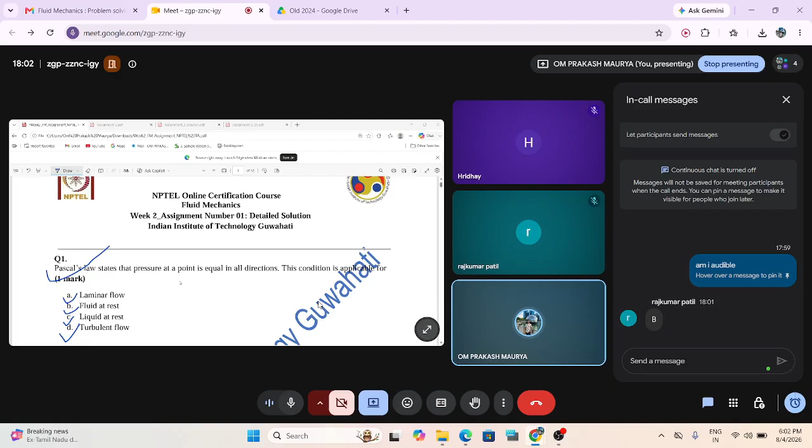Okay, so Patil is telling option B is correct, the fluid at rest. Yeah, definitely. Pascal's law talks about when the fluid is at rest. So your option is correct. This is a very basic question from your fluid statics. So now let us go with the second question. Let me just go to the second question.

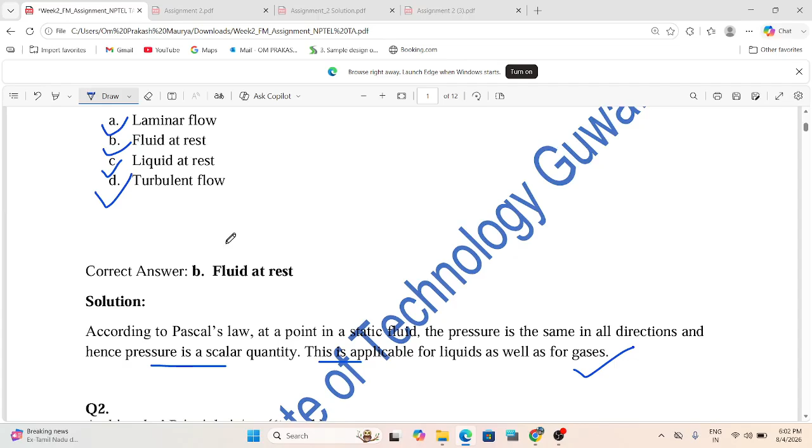So the explanation is, according to Pascal's law, at any point in a static fluid, the pressure is the same in all directions, and hence pressure is a scalar quantity, and this is applicable for liquid as well as for gas. So it should be for a fluid at rest. Option B is correct. So now let us go for question number 2.

Very interesting, very important. So Archimedes' principle is, and maybe one or more than one option is correct. So A, the floating body displaces its own weight in the fluid in which it floats. Option B is there, and option C and option D. So please just try to write your answer in the chat box. Just read the question very carefully.

Okay, so Rajkumar is telling D option. Other participants also just try to write your answer in the chat box. I'm waiting for another response, please. Just try to write your answer. You have 1 minute more.

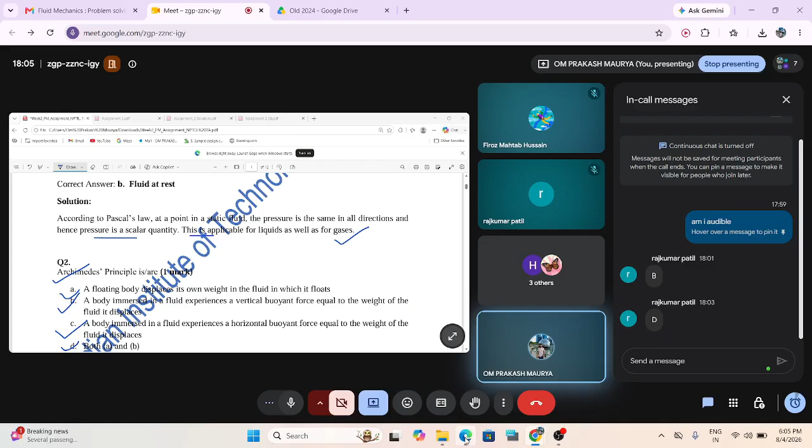Okay, so now let us explain. So yes, option D is correct. So as per Archimedes, option A and B both are correct. A floating body displaces its own weight in the fluid in which it floats. The meaning is, let us suppose you have put a body which is floating in the fluid, and whatever the volume is within the fluid, that much volume or that much weight of the

water will be displaced. And the weight of your displaced fluid is equal to the weight of the body. So the first one is correct. Option B, a body immersed in a fluid experiences a vertical buoyant force equal to the weight of the fluid displaced. This is correct. So both options are correct. So now let us move on to the next one. Here the explanation is given very well, so you can go through it.

Now numerical, 1 mark. So Umiam Lake is a freshwater lake near Shillong, India. It has a maximum depth of 40 meters and the mean atmospheric pressure is 91 kilopascal. Estimate the absolute pressure in kilopascal at this maximum depth. Take the specific weight of the water as 9790 Newton per meter cube. So you have to calculate. You have 4 options. So estimate the total absolute pressure in kilopascal.

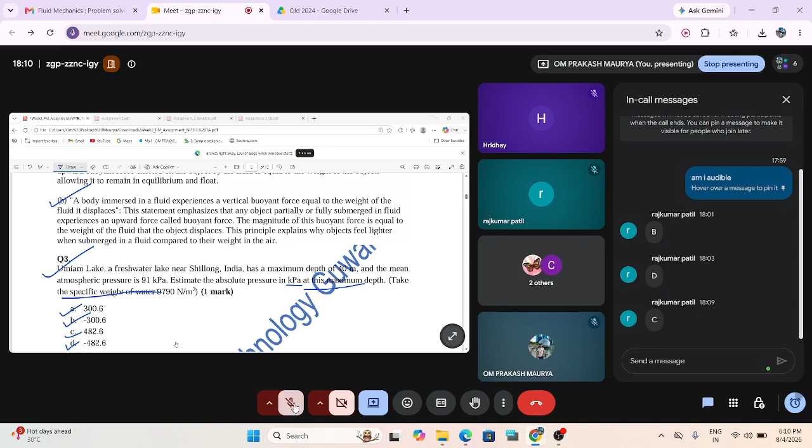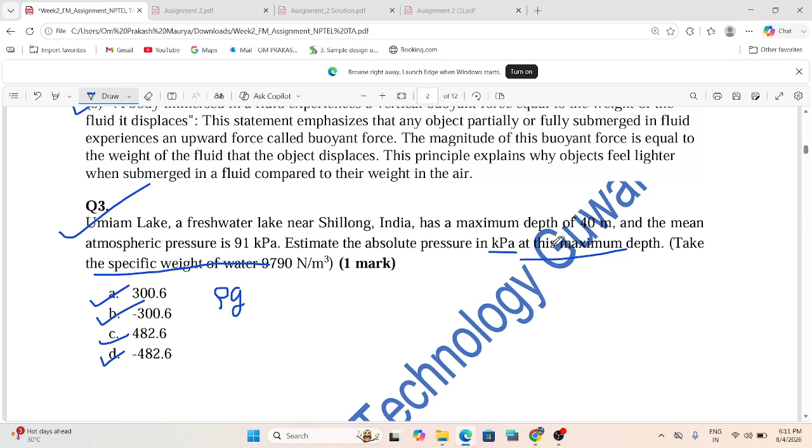Okay, so this is a very simple question. Let me just show you the answer. Here you can see the pressure is nothing but P is equal to rho g h. In the question, a specific weight is given. Specific weight is nothing but rho g. This is the specific weight and 40 is your depth; in the question it is written itself, 40 meters. So now rho g is 9790. So you will get this in Pascal.

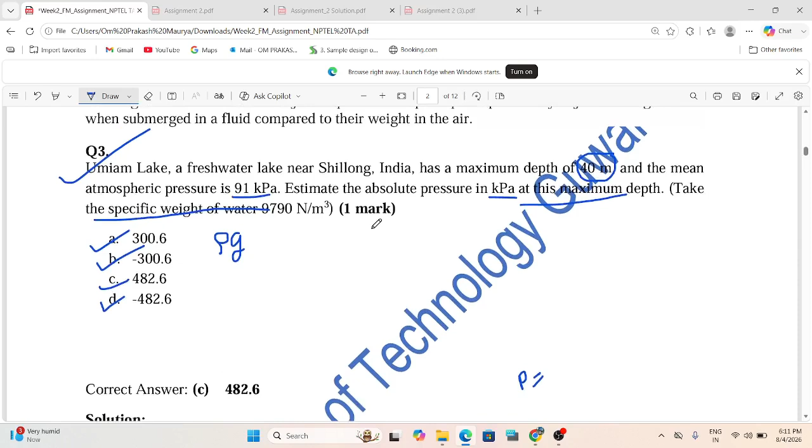Now the question is asking about the absolute pressure. So this is your gauge pressure. Now when you add the atmospheric pressure you will get the absolute pressure, and atmospheric pressure is 91 kilopascal. So finally we get 482.6 kilopascal. So option C will be correct for question number 3. Now let us move to the next question, question number 4.

A manometer is used to measure the pressure in a tank. The fluid used has a specific gravity of 0.85 and the manometer column height is 35 centimeters. If the local atmospheric pressure is 96 kilopascal, determine the absolute pressure P within the tank in kilopascal. So you have option A, option B, option C and option D. So please just write your answer in the chat box.

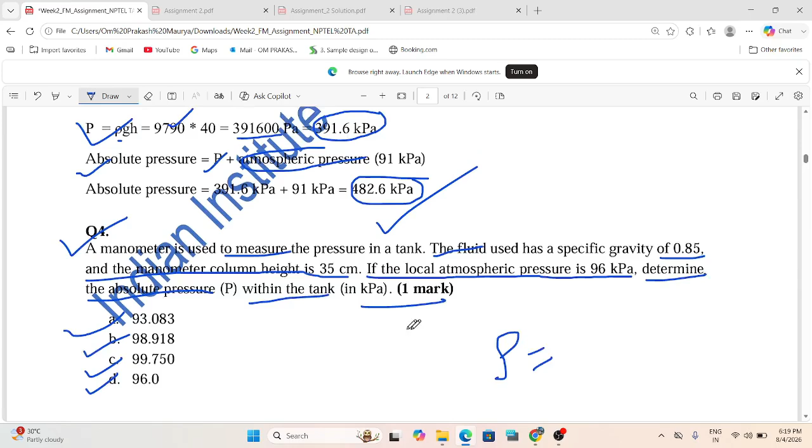So this is 0.85 and 1000, this will be rho, and g is 9.81 and h is given 35 centimeters, so you have to put in 0.35 in meter. So finally we will get 2.918, and atmospheric pressure in the question is given 96, so finally we will get 98.918 kilopascal. So here your option B is correct for question number 4. So now let us move on the next question, which is very interesting one.

So a tank contains two immiscible liquids of densities rho 1 and rho 2. So rho 2 is greater than rho 1, that is rho 2 is heavier than rho 1. If the height of the column of the liquid which has density rho 1 is h1 and that of the liquid with density rho 2 is h2, so the pressure at the interface between the two liquids is, so options A, B, C, D are given. So just think, very interesting question. So try to solve this question please and write your answer in the chat box.

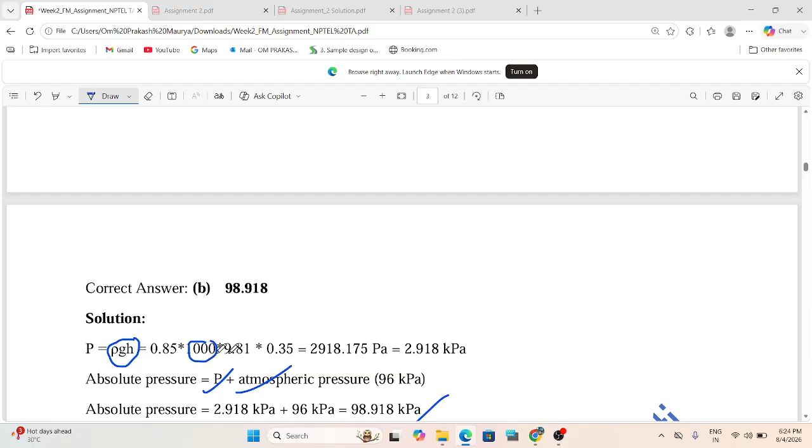So here you can see this is for the previous question, rho gh. So yes, in the question specific gravity is given 0.85. So specific gravity is what? The specific gravity is the ratio of the density of the fluid divided by the standard fluid. So when we calculate the density, specific gravity into the standard fluid density will give you rho, and then g is there, and h in the question is given. So you will get this in Pascal, so you have to convert into kilopascal. So finally this is your answer.

Now for question number 5, so you please just write your answer in the chat box. Hope you understand the previous question.

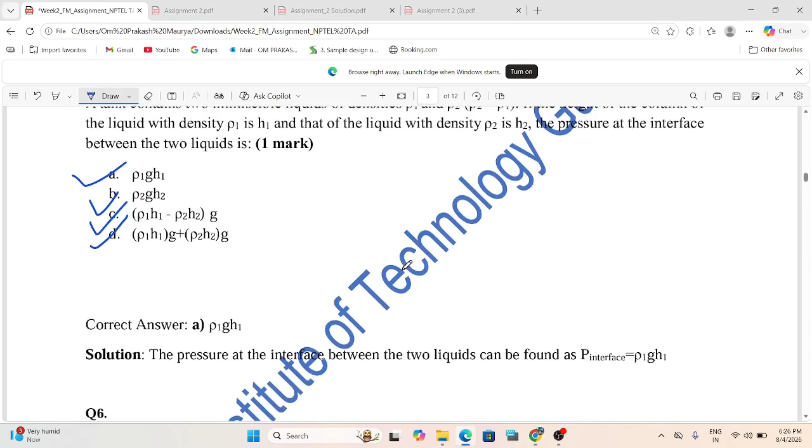So let me just explain you question number 5. So here, yes, this is definitely rho 1 g h1, because the question is talking about you have like that. The heavier one will be below, rho 2, this is your rho 1, and the height is h1, here height is h2. So your pressure will be at this location from the top. This is your liquid, so it will be at this interface.

So rho 1 g h1. If the question was asking at this location, you have to combine all. But the question is asking here, so rho 1 g h1, so option A will be correct. Hope you understand. So now let us move on the next one. Yeah, option A is correct. Thank you.

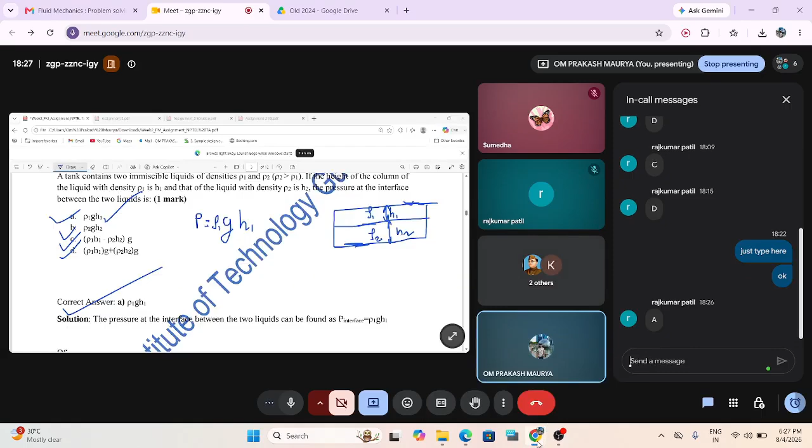So now the next question, question number 6. For a floating body, the metacentric height is the distance between. So you have 4 options. So please just try to write your answer in the chat box.

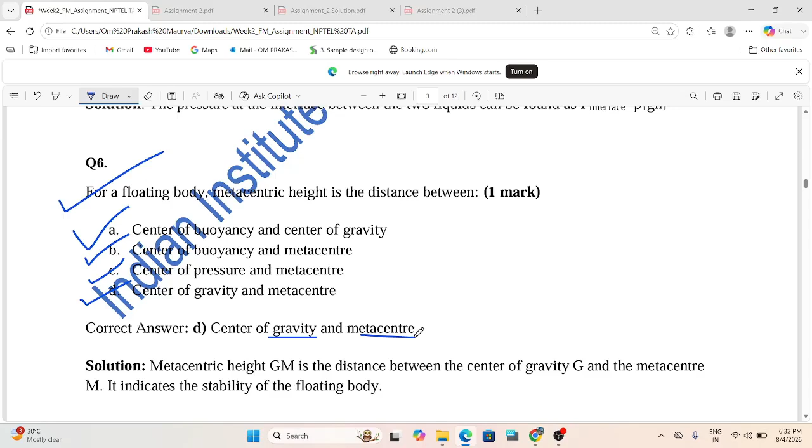Okay, so let me just show you the answer. So actually the metacentric height is the distance between center of gravity and metacenter. So remember always please. So here explanation is given. You can go through. So metacentric height GM is the distance between center of gravity and the metacenter M. It indicates the stability of the floating body. So now let us move on the next question. Question number 7.

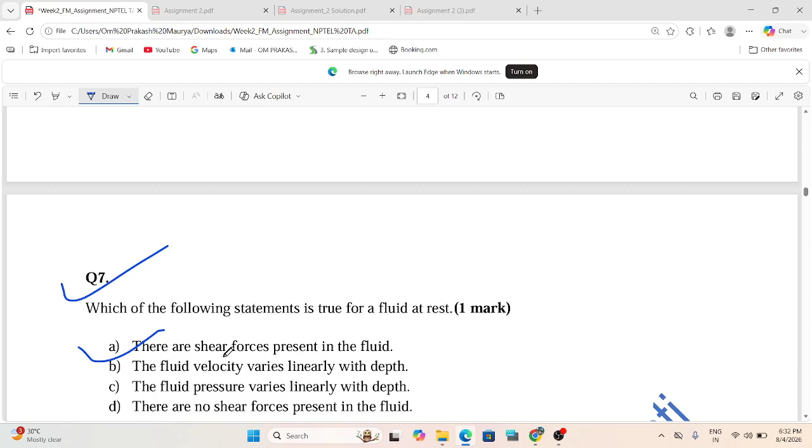Yeah. So which of the following statements is true for a fluid at rest? There are shear forces present in the fluid. The fluid velocity varies linearly with depth. The fluid pressure varies linearly with depth. There are no shear forces present in the fluid. So which option will be correct?

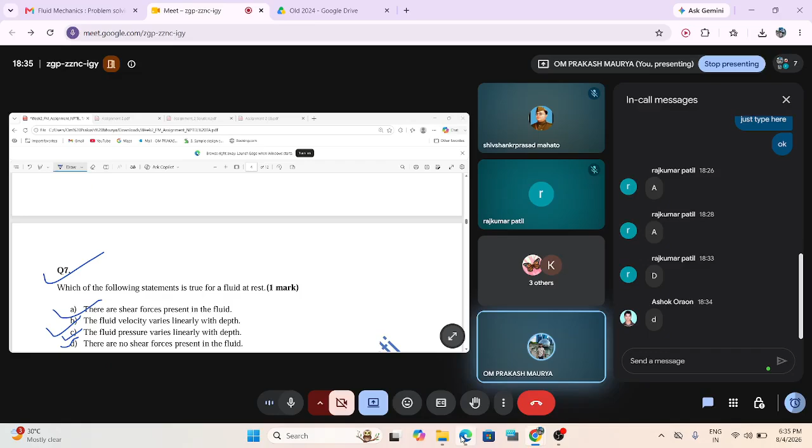Okay, so Rajkumar is telling option D. So I'm waiting for other participants. Option D or... Okay. Okay, Shivshankar. So Ashok is also telling D. So D should be correct. Let me just go. Yeah, option D is correct for question number 7.

So the explanation is, in a fluid at rest, there are no shear forces because shear force arises from the fluid motion. The only force present in the static fluid is the normal force due to pressure. Now let us move on to the next one. Question number 8.

So the concept which defines that the pressure at a certain horizontal level in a static fluid is proportional to the vertical distance to the surface of the fluid is known as: Pascal's law, the Magnus effect, Archimedes principle, or hydrostatic paradox. So which option will be correct, please?

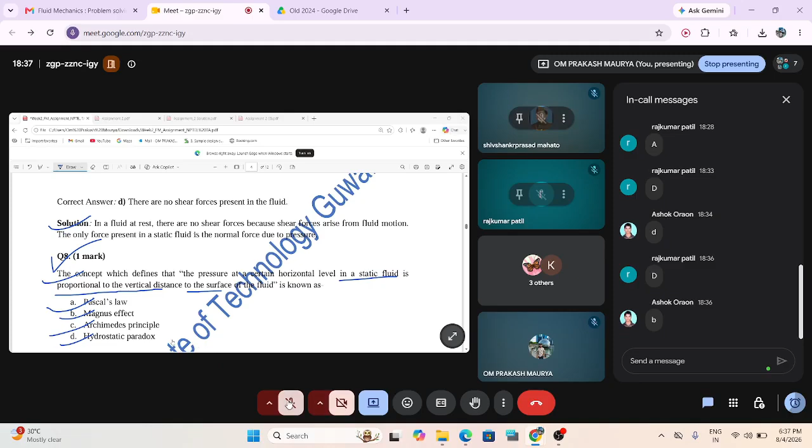Okay, so Rajkumar is telling D and Ashok is telling B. Okay, let me just see. So let me just show you the answer. So it is hydrostatic paradox. Remember, please, option D will be correct. So what is the solution?

The hydrostatic paradox states that the pressure at a certain horizontal level in a static fluid is proportional to the vertical distance to the surface of the fluid. That means on a horizontal plane, at each point, the pressure is the same, provided they are interconnected by the same fluid only. So remember. So next one, question number 9.

So a cube of dimension 2 meter is floating in the water with an immersed depth of 1 meter. The unit weight of water is 10 kilonewton per meter cube. So what is the weight of the cube in kilonewton? Okay, so he's telling option A. Okay.

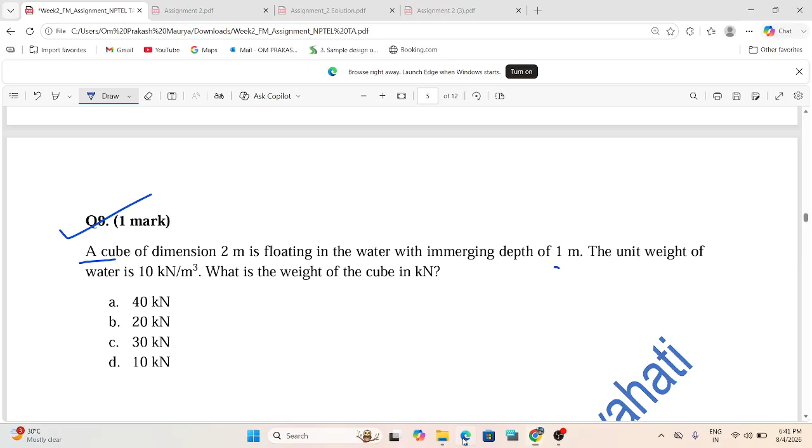Okay, so let me just show you the answer. Yes, A is correct. How? A cube of dimension 2 meter is floating in water with an immersed depth of 1 meter. Means, let us suppose, you have one cube which has the depth of 2 meter. Okay, so 1 meter is immersed. This much is within water. This is 1 meter.

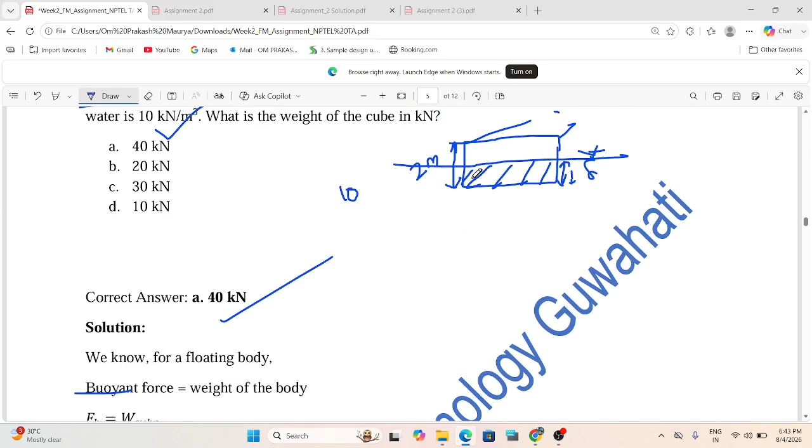The unit weight of water is 10 kilonewton. What is the weight of the cube? So weight of the cube is what? As per the Archimedes principle, the buoyant force is equal to the weight of the body. So what will be the buoyant force FB? FB is nothing but the weight of the displaced volume, weight of the displaced water. So rho g and volume.

What is force? Force is nothing but your mass M. So what is M? M is rho by V. So what is your, no sorry, rho is equal to m by v. So what will be the m? M is rho into v. So this is rho into v and g.

And weight of the cube is what? Here it is given the unit weight 10 kilonewton per meter cube. So you have to multiply with the volume. So volume is 2 into 2 into 1. So finally you will get 40 after the calculation. So your option A is correct for question number 9.

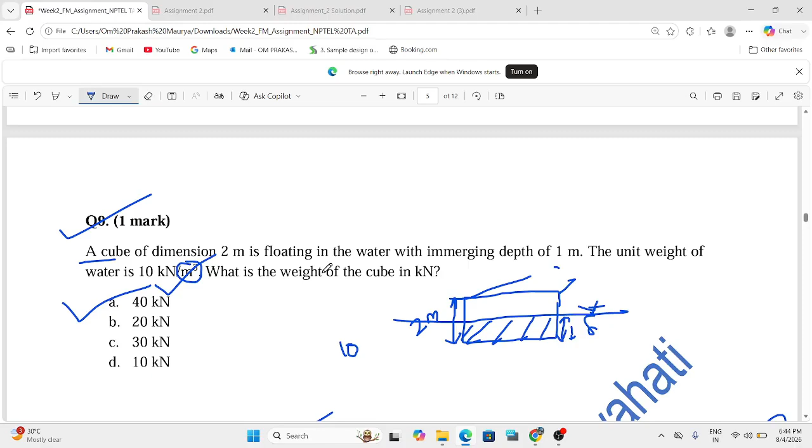So here it is the immersed volume. Remember please, this is your y1 because we are considering the immersed volume. Why immersed volume? Because the immersed portion only is displacing the water, not all portions of the body. That's why. So now let us move on to the next question.

The specific gravity of an oil is 0.8. What will be the equivalent head of oil if the head of water is 400 centimeter?

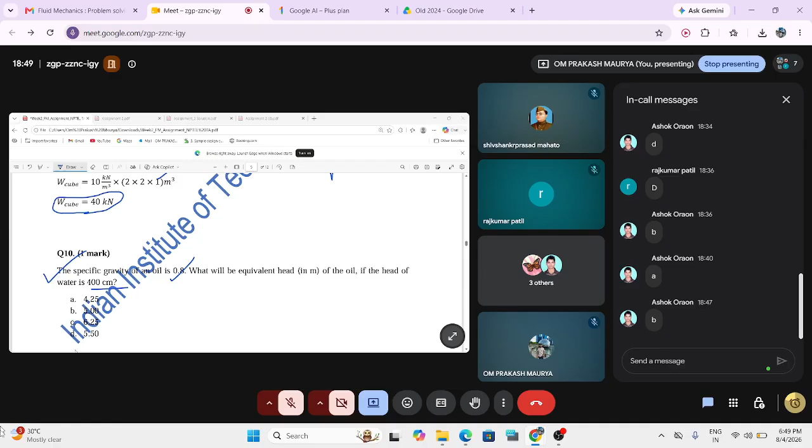Okay, so let me just explain. So you have the specific gravity of oil is 0.8. So the density will be 800 kg per meter cube. If the head of water is 400 centimeter, head of water means what? H you have 400 centimeter, means 4 meter.

So this is... so one thing is important: the pressure on both sides due to oil is equal to the pressure of water, because the question is asking about the equivalent head, which means equating the pressures.

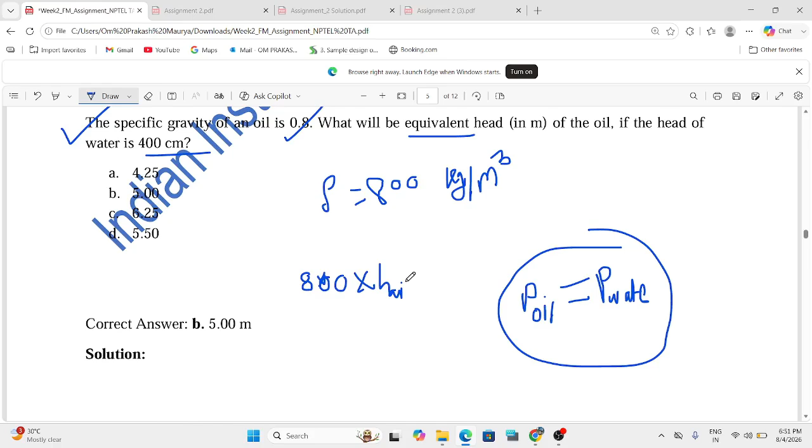So pressure is what? Rho gh. So rho is 800 into g, g will be cancelled out, and h of the oil is equal to, so here also rho of water, g and h. So g and g will be cancelled out. So here, why is this written like that, how will we get the 800?

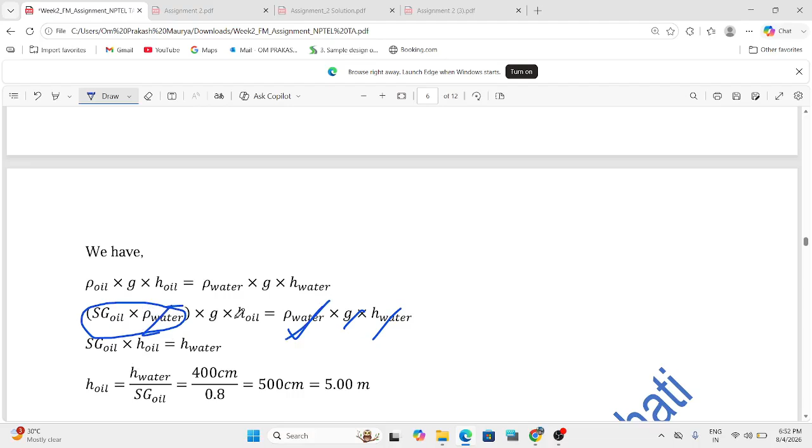So rho of oil divided by rho of water is your specific gravity. So rho of oil is nothing but specific gravity into rho of water. So it is written here. Rho of water will be cancelled out. So specific gravity of oil into height is equal to the height of water. So finally you will get 5 meter. So option B will be correct for question 10.

So now let us move on to the next one. Very interesting. A block of concrete weighs 500 Newton in the air and weighs only 250 Newton when immersed in fresh water. The specific weight is given here. What is the average specific weight of the block? So you have four options in kilonewton per meter cube.

So actually today I have a power problem, the electricity. So maybe after 5 minutes I'll join through my mobile and then I'll record the session and we'll discuss the questions. So in between, if the call disconnects, please be there. I will join. Okay, sir.

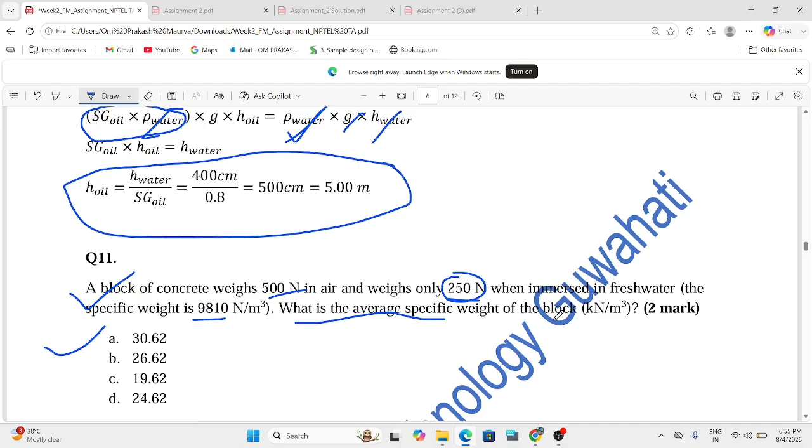So let me just show you the answer. So here you have the concrete weight 500 Newton. When we immerse it in the water, the weight is only 250 Newton, as you know, due to the buoyant force. So the question is asking about the average specific weight of the block. Now, let me just show you the solution.

So concrete weight is nothing but gamma into volume, which in the question is given as 500 Newton. The air effect is neglected. When we immerse it in the water, you have to take the submerged weight: gamma of the block minus the unit weight of water, into volume. So this is equal to 250. So you have two equations, one when immersed in the water, another in the air. The average specific weight of the block you have to calculate.

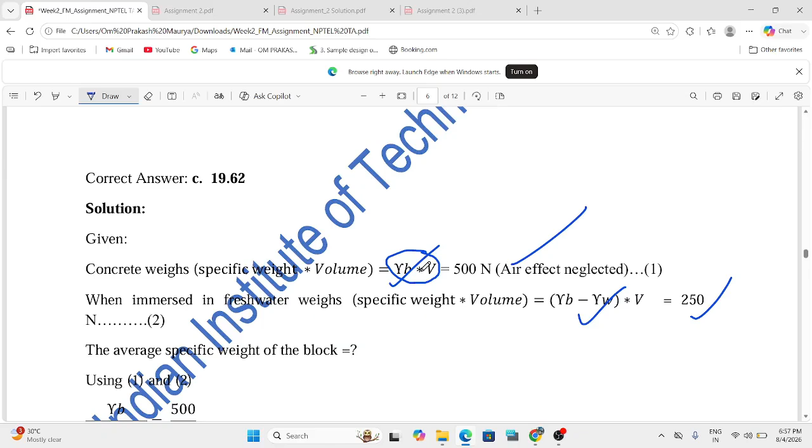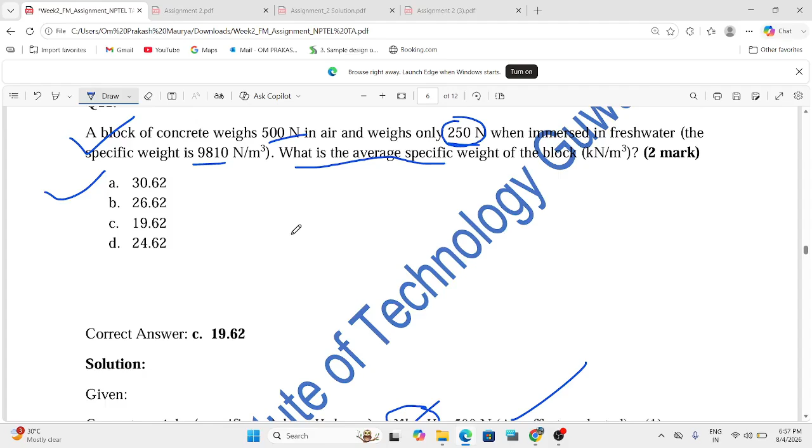So when you go for calculation, just divide equation 1 and equation 2. The unit weight of water in the question is given, 9810 Newton per meter cube, but here you need to put it in kilonewton, so it will be 9.81. So finally you will get 19.62 kilonewton per meter cube. So hope you understand question number 11.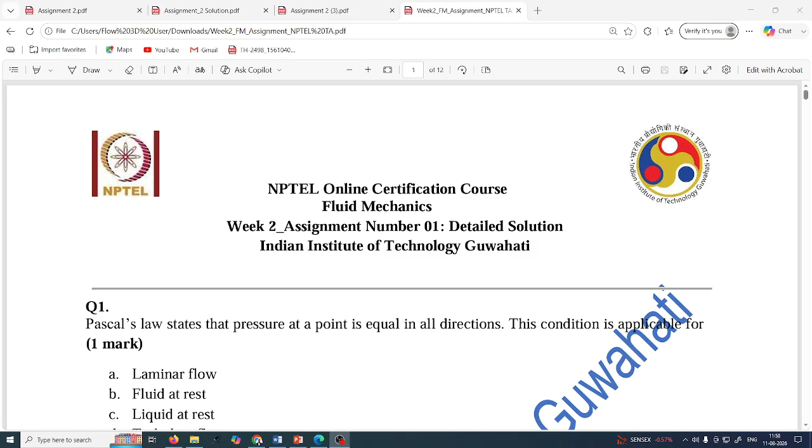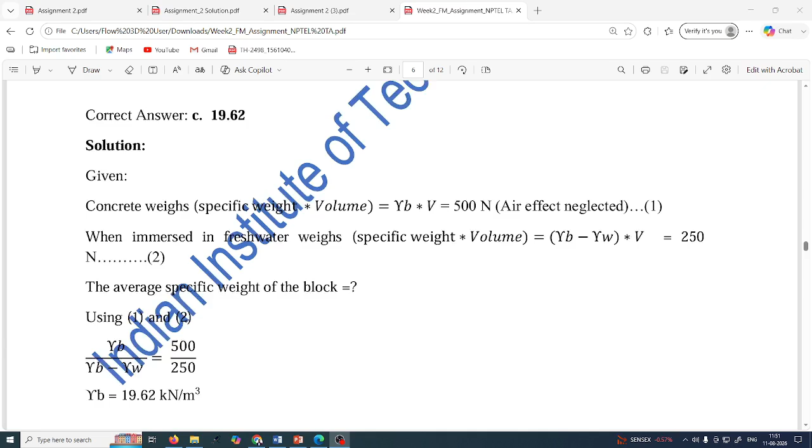Now question number 12. So on 4 August we solved 12 questions for week number 2. There was an electricity problem at that time, so we solved up to question number 12 only. So let us start with the further ones. That time I recorded only 1 hour, so the remaining 1 hour I am going to record here. So we'll see a lot of questions. We have solved up to question number 11, I think. So yes, question number 12 needs to be calculated.

So question number 12: a vertical rectangular gate 3 meter high and 2 meter wide is submerged in water such that the top edge is 1 meter below the water surface. Calculate the total hydrostatic force acting on the gate. So you have a rectangular gate which has 3 meter height and 2 meter width.

The 3 meter and 2 meter, and 1 meter below the water surface. So this is 1 meter. All units in meter. Now you need to calculate the hydrostatic force acting on the gate, how much hydrostatic force acts on your gate. So how will you calculate?

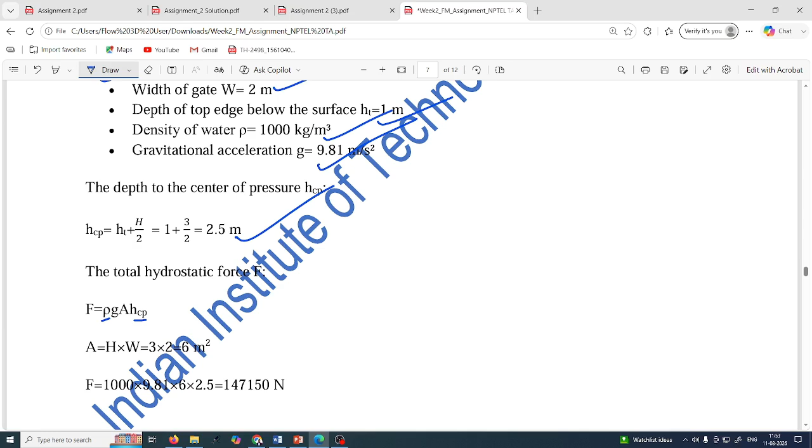Now what is force? This will be rho g h into A, that is the rho g h I was talking about, and A will be what? A will be height into width, which is 6. So finally you will get F equal to 1000 into 9.81 into 6 into 2.5, so you will get the final value.

147150. So this will be your correct answer for this question. So for question number 12, option A will be correct. Hope you understand what I am talking about.

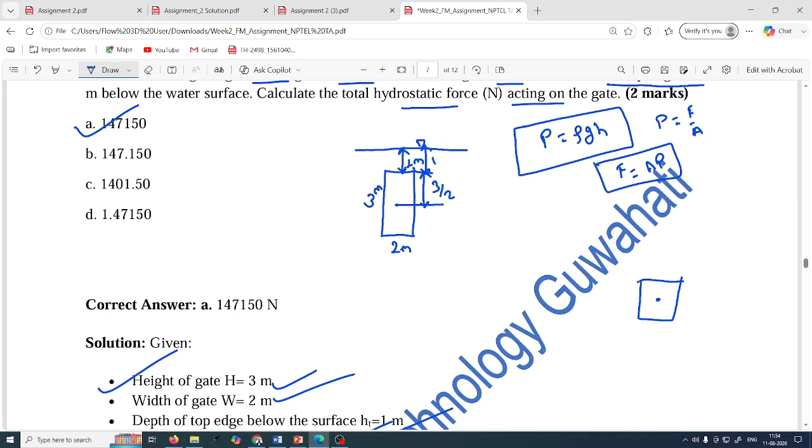So now, h means what? h means the middle one. So here this is your 3 by 2 and this is 1. So the center from the top will be 1 plus 3 by 2. That's why here it is written 1 plus 3 by 2. So now let us move further.

Question number 13. A wooden block of density 500 kg per meter cube with dimension 2 meter into 1 meter into 0.4 meter is floating in water. Determine the volume of block submerged in water. So here we need to calculate the volume of block submerged in water.

You have the water surface, and let us suppose this is your block, which has 2 meter, 1 meter, and thickness 0.4. So now we need to calculate the submerged volume. The density of your block is given, and the density of water you know already, 1000. So we need to consider these two things. So how will we proceed? As per the Archimedes principle, we will follow the same thing here.

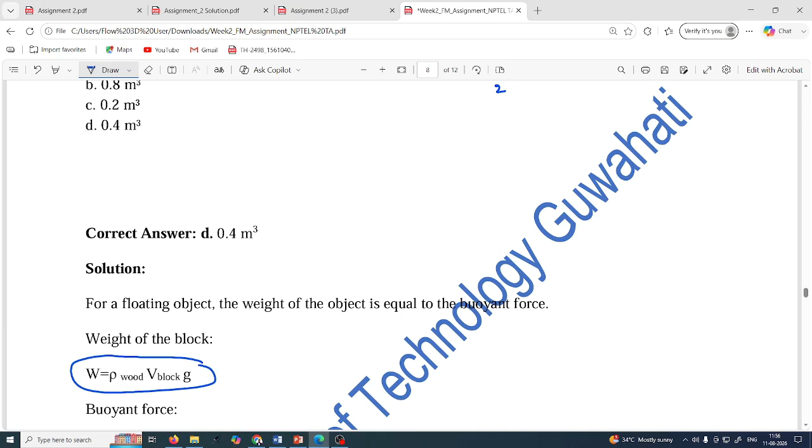As you know, the weight of the block is rho of block into volume of block into g. And what will be the buoyant force? Buoyant force is nothing but rho of water into the submerged volume into g. And as per Archimedes, when the body is floating, the buoyant force is equal to the weight of the body, the weight of the block.

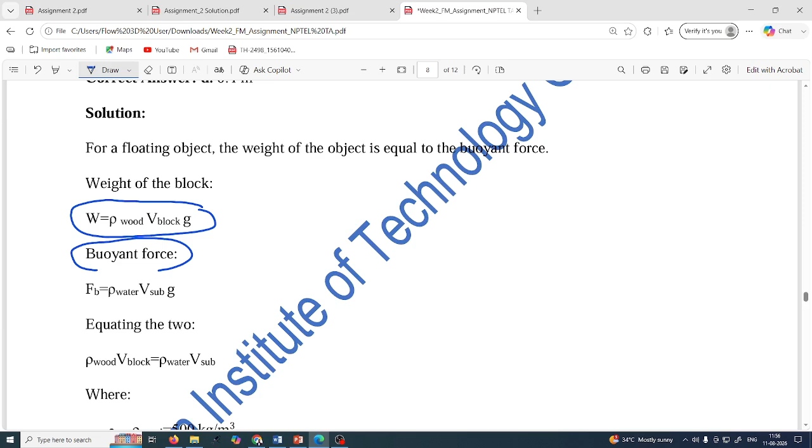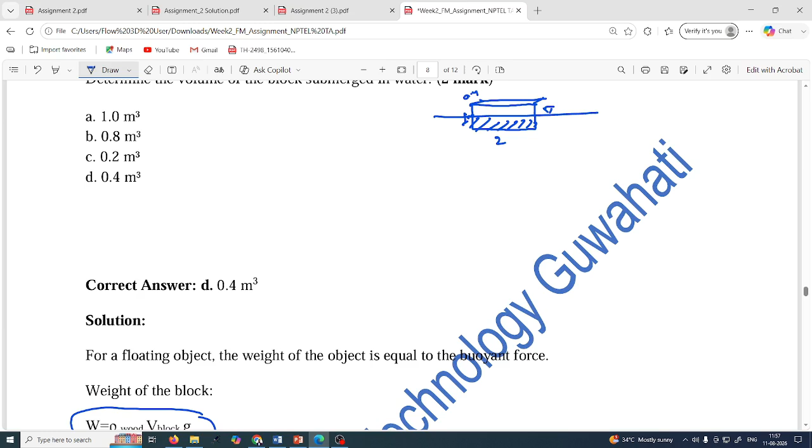So here you need to put the formula. g will be cancelled out. Rho of wood and the volume of block you know, rho of water you know, and the submerged volume you can calculate very easily. So you will finally get a submerged volume of 0.4 meter cube. Very simple question, but you need to understand the Archimedes principle, or general understanding you can say. So option D will be correct here.

Now let us move on to question number 14. This is a 2 marks question. Estimate the distance of center of pressure below the free surface for a vertical triangular plane as shown in the given figure, which is submerged in water with one side on the free surface and the vertex downward. The height of the triangular plane is a.

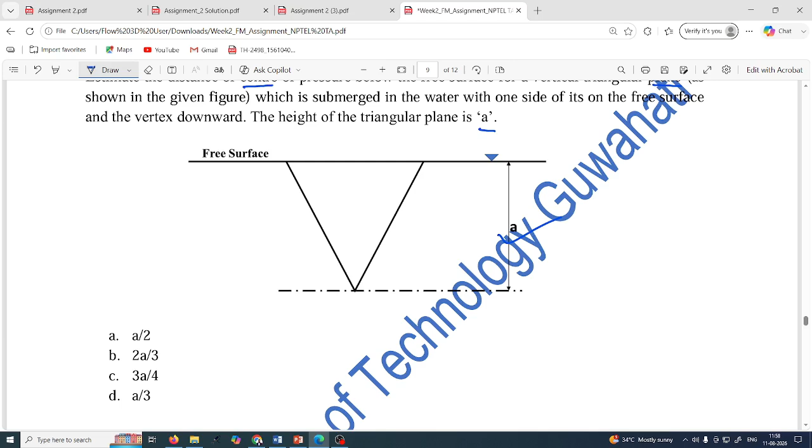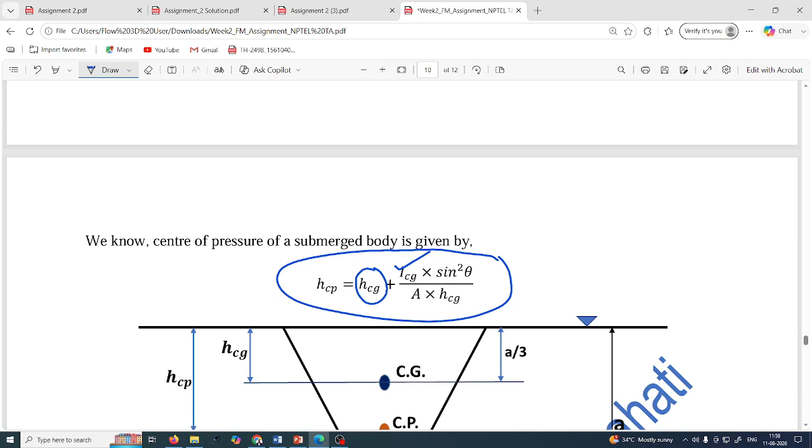So here height is given as a, this is the free surface, and the figure is like this. Here you need to calculate the center of pressure, hcp. So how will we calculate it? The center of pressure is the center of gravity plus the moment of inertia about the center of gravity into sine square theta, divided by A and the center of gravity depth.

So very easily you can calculate from the top: the center of gravity will be a by 3, and your CP will be somewhere below. Why is it below? Because you are adding something here, so definitely it is going to be below. For a triangular block, I is bh cube by 36. So b is b and h is a, you can put like that. After the calculation you will get hcp equal to a by 2.

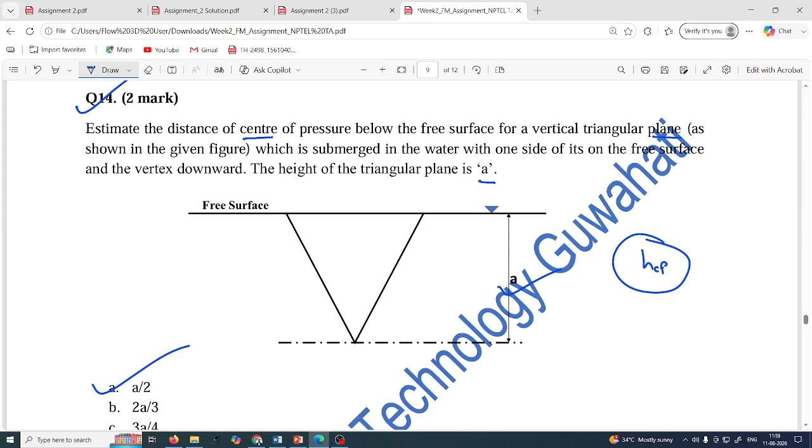This is a very standard question, so you can expect such a question in your final NPTEL exam. So option A will be correct here for question number 14. Now let us move on to the next question, question number 15.

Question number 15: if 90% volume of an iceberg is immersed in seawater and only 10% volume is above the water surface, what is the density of the iceberg in kg per meter cube? The density of the seawater can be taken as 1025 kg per meter cube.

The density of sea water is slightly higher than the density of normal water. As you know, 10% is the value given. Now we need to calculate the density, using the same principle as before.

Let us assume you have the sea like this, and 90% of the iceberg is immersed, meaning 0.1 of the volume is above and 0.9 of the volume is below the water. This is your iceberg. Now the density of sea water is given. So what is the formula?

The weight of the iceberg, weight of ice, is equal to buoyant force because it is floating, and this concept should be valid. So the weight of the iceberg is density of ice into volume of ice, into g.

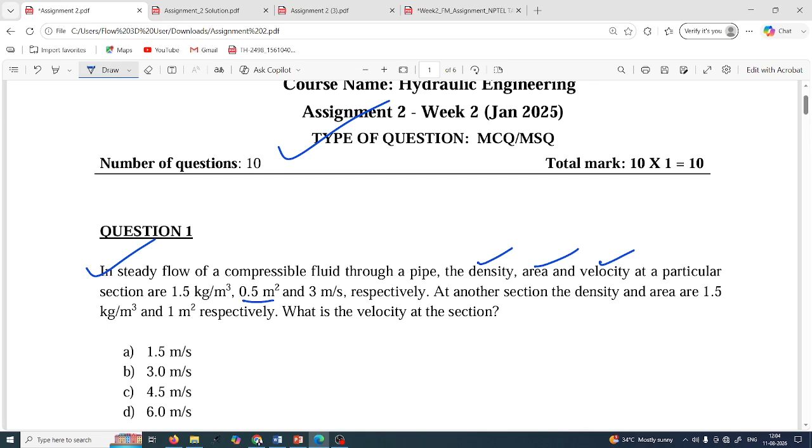Very simple conservation of mass. The equation is rho1 a1 v1 equals rho2 a2 v2. Here you need rho1 and rho2 written because it's compressible flow. The density and area at the particular section are given as 1.5 and 0.5. You can put in the values and you will get the final answer. Very simple question, so now let us move to the next one.

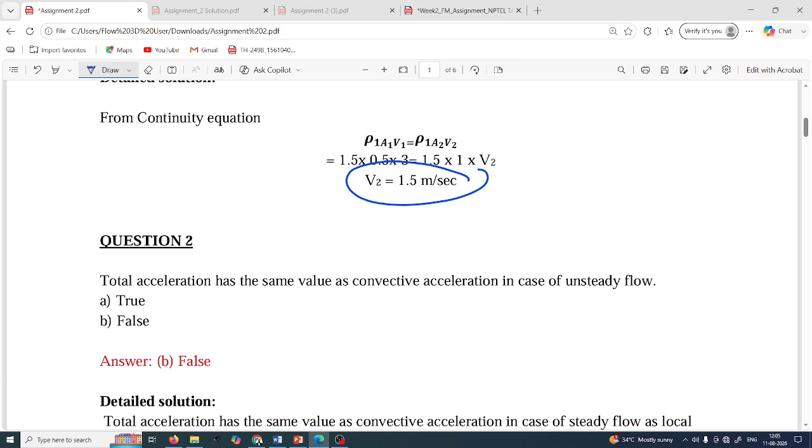Next question: the total acceleration has the same value as convective acceleration in case of unsteady flow - true or false? It will definitely be false, because unsteady means the fluid property with respect to time should not be constant.

The acceleration has two terms. In the x direction, there is the time component du by dt, which is the local acceleration, and the convective acceleration, which is u du by dx plus v du by dy plus w du by dz. This is your convective acceleration.

So this is for unsteady condition. In unsteady condition, your total acceleration is not equal to only the convective acceleration, it is equal to the local acceleration as well as convective acceleration. So this will be false. If the flow is steady, then this term will be 0, because there is no variation with respect to time. So your total acceleration in case of steady flow will be equal to your convective acceleration. Very simple question. Now let us move on to the next one.

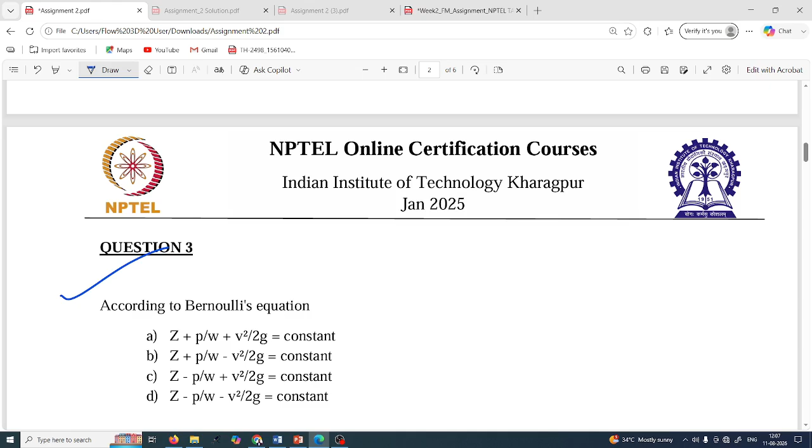Next question is, according to Bernoulli's equation, which equation is satisfied? So z plus p by w plus v square by 2g, and z plus p by w minus v square by 2g, and here it is given z minus p by w plus v square by 2g. Only the plus and minus signs are changed, everything else is same. As per Bernoulli's equation, your head summation should be constant. So option A will be correct for this question, very simple one.

Now let us move on to the next one. Question number 4: the velocity component u is equal to lambda xy cube minus x square y, and v is equal to xy square minus 3 by 4 y to the power 4. Then the value of lambda for possible flow field involving steady incompressible flow is. So here we need to calculate the value of lambda, given the condition of steady incompressible flow. So what is the steady incompressible flow condition? Your continuity equation should be satisfied.

So what is the continuity equation? You already know. Del u by del x, del v by del y, and del w by del z is equal to 0. Now you have to calculate the partial differentiation corresponding to x, y, z, and sum them. Very easily we can calculate this. We have only two components here, u and v, so we'll look at only the two dimensional components.

So what will be del u by del x? It is nothing but del by del x of lambda xy cube minus x square y. Once you differentiate it, you get lambda y cube minus 2xy. Similarly, for del v by del y, v is xy square minus 3 by 4 y to the power 4. Differentiating with respect to y, you get 2xy minus 3 by 4 into 4y cube.

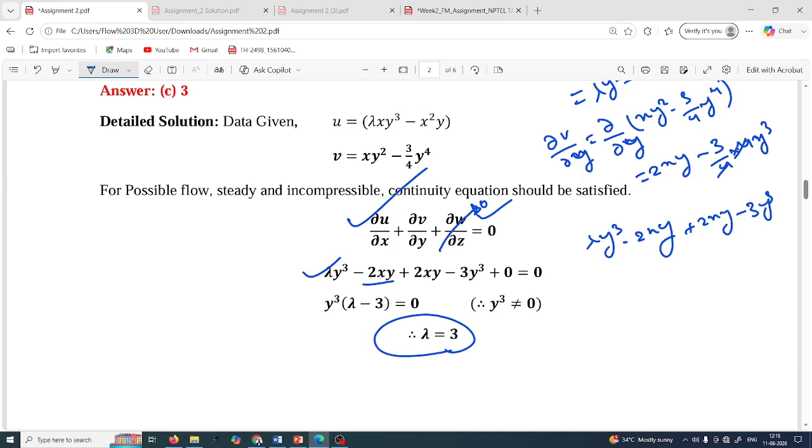Very simple one. So now let us move on to the next one, question number 5.

The concept of stream function, which is based on the principle of continuity, is applicable to rotational flow only, two-dimensional flow only, three-dimensional flow only, or uniform flow only. So the concept of stream function is applicable to two-dimensional flow only, remember this. The detailed solution is also given, let me read it for you. The stream function is defined only for two-dimensional flow, which is steady and incompressible. Properties of stream function: if psi exists, it follows the continuity equation, and the flow may be rotational or irrotational. If psi satisfies the Laplace equation, then the flow is irrotational.

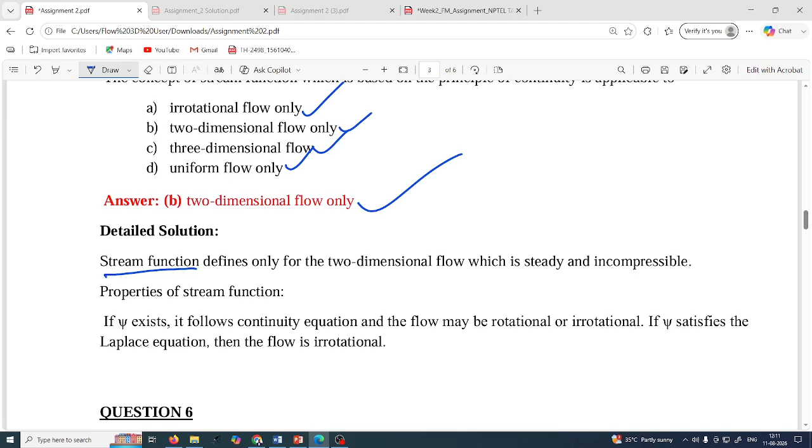Understandable. If only the continuity equation is followed, it means the flow may be rotational or irrotational, both are possible. But if it follows the Laplace equation, the final condition is only irrotational flow will be valid.

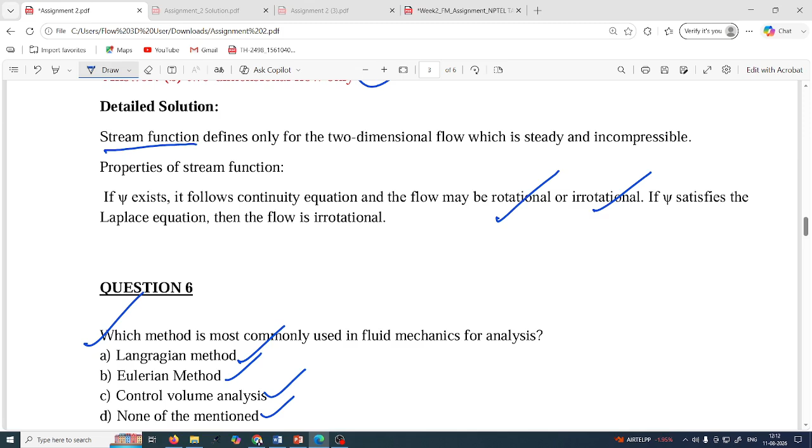Remember this for the future. Next question: which method is most commonly used in fluid mechanics for analysis? The Lagrangian method, Eulerian method, control volume analysis, or none of the mentioned. Because in fluid mechanics we generally solve using a control volume approach, Eulerian method will be correct here. Remember please, we can illustrate the Eulerian method like the control volume approach also, so always remember this.

Question number 7. So the next question is, which of the following is correct? The path line of two particles in a one-dimensional flow can never intersect. The path line of two particles in a one-dimensional flow can never intersect if the two particles move along the same direction.

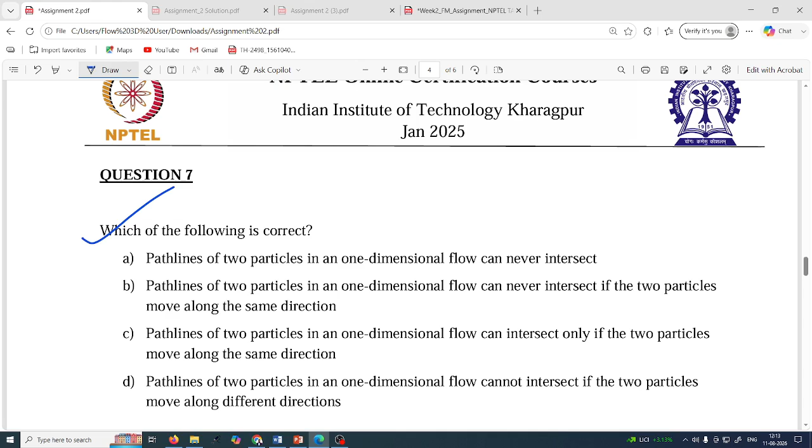The path line of two particles in a one-dimensional flow can intersect only if the two particles move along the same direction. Option D says the path line of two particles in one-dimensional flow cannot intersect if the two particles move along different directions. These are long options, so you need to read very carefully. Option B will be correct here: the path line of two particles in one-dimensional flow can never intersect if the two particles move along the same direction.

Question 8 is about the continuity equation given by del vector dot v vector equals 0, where v vector is the velocity vector. Which one of the following is a necessary condition: steady, irrotational, inviscid, or steady and incompressible? Option D will be correct here. This is simple, so I will not go into detail.

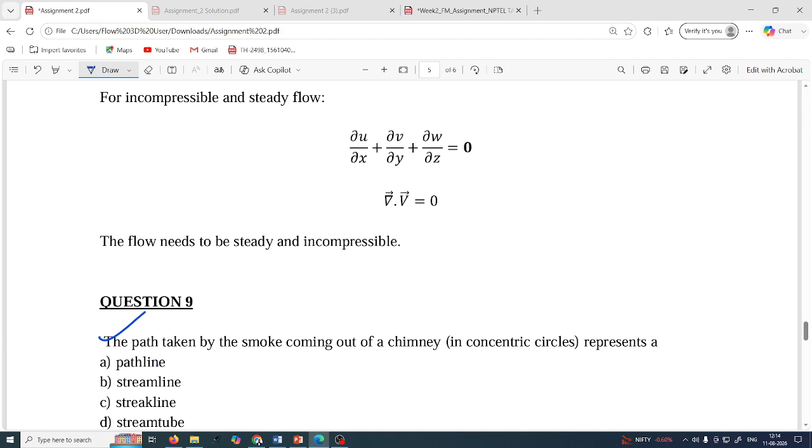Next, the path taken by the smoke coming out of a chimney in concentric circles represents a path line, streamline, streak line, or stream tube. This is option C, streak line.

The final question, question number 10: which of the following is correct? There will be no flow across the stream tube, there will be no flow along the stream tube, there will be no flow both across and along the stream tube, or there will be flow both across and along the stream tube. Option A will be correct here, as you can see there will be no flow across the stream tube.

Now we'll move on to the next week's question. The question is, what is the atmospheric pressure at sea level? Whether it is 101.3 kilonewton per meter square, 10.3 meter of water, 760 mm of mercury, or all of these. Definitely all values are the same, so all options will be correct.

The next question is very interesting, remember please: the height of the water column equivalent to a pressure of 0.2 megapascal is what? It is nothing but 20 point something. How will you calculate the height of water column equivalent to pressure?

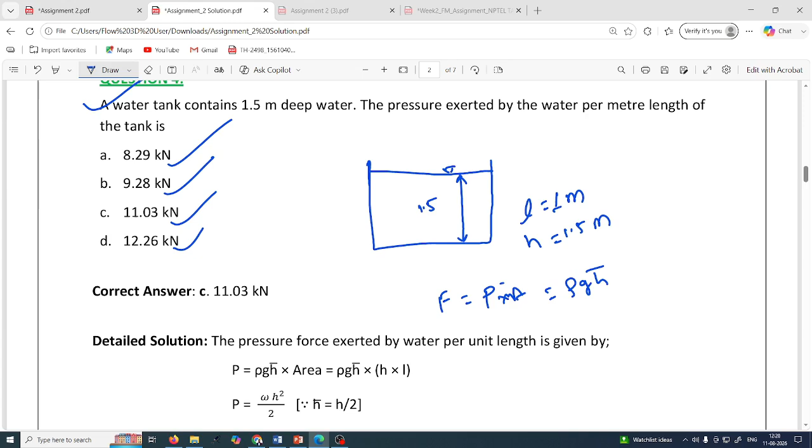So per meter length means L is equal to 1 meter is given, and height is already given 1.5 meter. So now what is pressure force actually? Pressure force is nothing but the pressure into area. So what is pressure? Rho g h bar into area. So rho is, as you know, 1000.

So here rho is 1000 and g is 9.81, and h bar is what? It is nothing but h by 2. So if A is h into L, so rho g h by 2 into L, what will you get? Rho g h square by 2. And rho g is nothing but your omega, the unit weight of water. So this is only the simplified version of your equation.

So 1000 into 9.81 into 1.5 meter square by 2, this will give it. Finally you will get 11.03 kilonewton. So option C will be correct here for question number 4. Now let us move on to the next one.

Our next question is question number 5. Very simple one. The equation of the streamline passing through the origin in a flow field u equals cos alpha, v equals sin alpha, for a constant alpha, is determined as: A, y equals x cube; B, y equals x cot square alpha; C, y equals x tan alpha; and D, y equals alpha sin x. So these options you have.

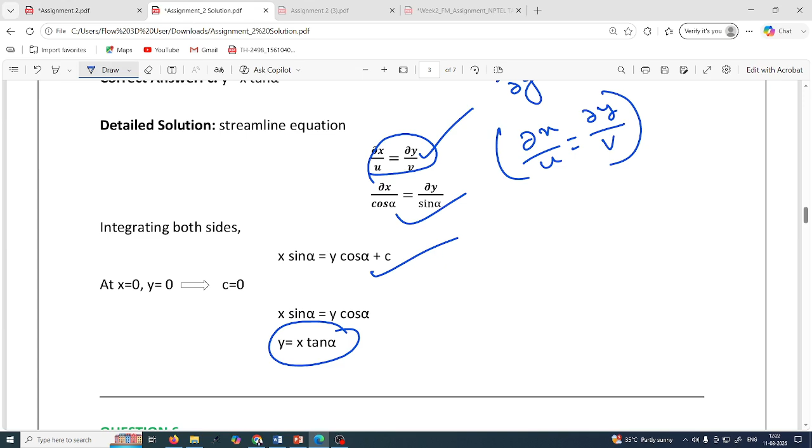After integrating both sides, this will be x sin alpha equal to y cos alpha plus c, and at x equal to 0, y equal to 0, because it passes through the origin. So c will be 0, and after rearranging the terms you will get y is equal to x tan alpha. So for question number 5, option C is correct. Very interesting question, you can remember.

Next question. A uniform body 3 meter long, 2 meter wide and 1 meter deep floats in water. If the depth of immersion is 0.6 meter, then the weight of the body is what? Similar question as we have solved previously, the same principle, Archimedes principle. Archimedes principle tells that the weight of your floating body is equal to the buoyant force.

Weight of body is nothing but rho of body into volume of the body into g, equal to the buoyant force, which is rho of water into the volume submerged, or displaced, same thing. Whatever volume is submerged, the same amount of volume will be displaced from your container, into g. So g will cancel out.

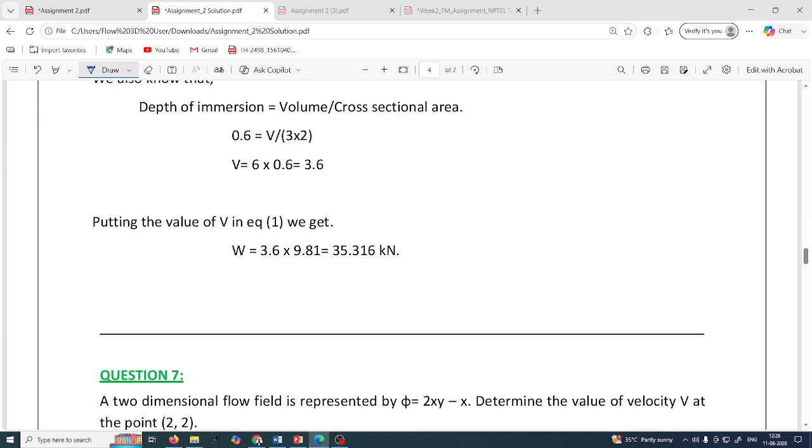Now let us move on the next one, question number 7. A two-dimensional flow field is represented by phi. Phi is equal to 2xy minus x. Determine the value of velocity V at the point (2, 2). So very simple one. Option A is 1, option B 4, option C 4.12 and option D 5.

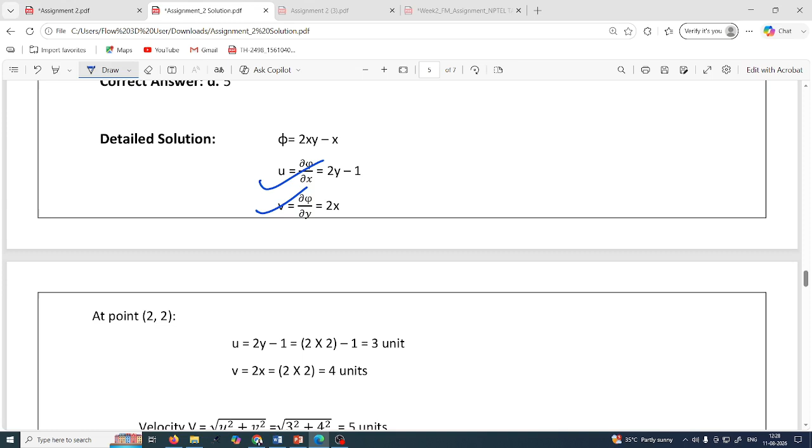You know the very simple formula. It is nothing but u is equal to del phi by del x, and v is equal to del phi by del y. So very simple. The partial differential you can do very easily, and after getting your value u and v, just take the magnitude. So 5 units will be the correct answer for question number 7. So option D will be correct here.

Now let us move on the next one, question number 8. In a steady flow of a compressible fluid. The similar question we have seen already, so we will not go much about it. Just simply rho1 A1 V1. The imaginary line drawn in a field in such a way that the tangent to any point gives the direction of motion at that point is known as streamline. Option A will be correct here.

Next one, question number 10. A streamline is a line. So similar question we have, it is the imaginary line which is tangential to the velocity vector everywhere at the given instant. Now let us move on the next one. The pressure less than the atmospheric pressure is known as suction pressure, vacuum pressure, negative gauge pressure, all of the above. So you can say all of the above.

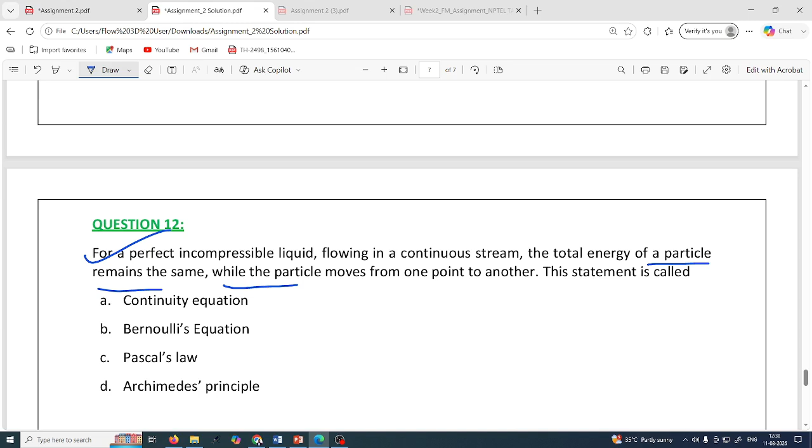Question 12. For a perfect incompressible liquid flowing in a continuous stream, the total energy of a particle remains the same while the particle moves from one point to another point. This statement is called what? Total energy should be same. So this is energy balance, energy conservation. So this is your Bernoulli equation. So now let us move on the next one. Very interesting.

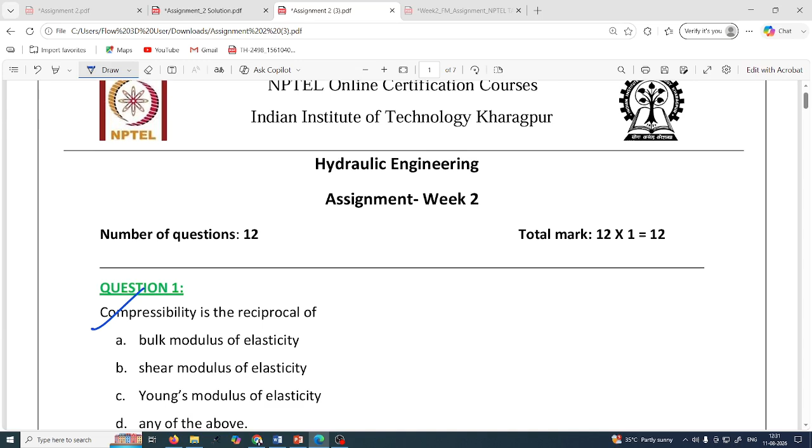So next one is hydraulic engineering, which is again from IIT Kharagpur. These are the previous questions. Maybe you can expect your assignment like that and the final NPTEL exam also. Question 1: the compressibility is reciprocal of what? The bulk modulus of elasticity, shear modulus of elasticity, Young's modulus of elasticity, or any of the above. Compressibility is related to bulk modulus of elasticity, so it is the reciprocal of bulk modulus of elasticity. Next question.

Find the equivalent head of mercury, S equal to 13.6, for a 10-meter head of water. Means you have water head 10 meter. Means rho g h, rho of water and h of water, means 1000 into g into 10. This much value you have. In terms of pressure I am writing. The 10-meter head of water means the pressure is this much Pascal.

Now the equivalent head in terms of mercury. As you know, this is 13 times heavier than water, so the value should be less than 10. So how will we calculate? Just equate the pressure of water to the pressure of Hg. So this is 1000 into 9.81 into 10 is equal to... S is what? S is the specific gravity.

What is the specific gravity? It is the rho of your fluid or liquid divided by rho of the standard one. Here the value is given as 13.6, and rho of Hg divided by the standard, which is water, 1000. So rho of Hg is 13.6 into 1000 kg per meter cube. So you can write 13.6 into 1000 into 9.81, and you need to calculate H, the height of mercury. So 9.81 cancels out, 1000 cancels out.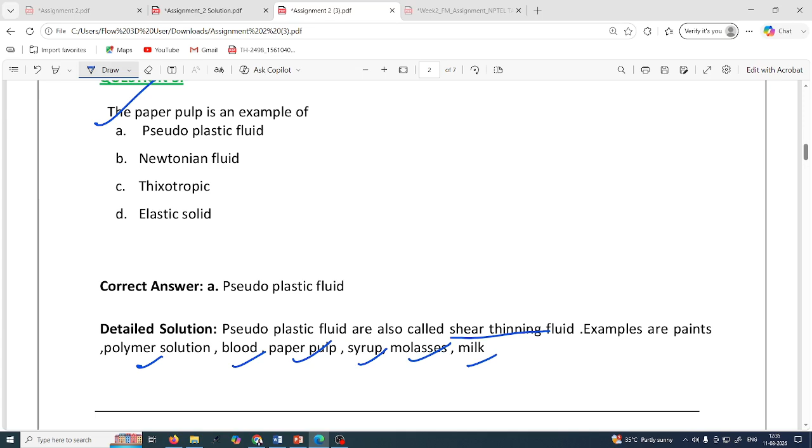Question number 4. A water tank contains 3 meter deep water. The pressure exerted by the water per meter length of the tank is what? A similar question; in the previous question it was 5 meter depth of water, here it is 3 meter. Very simple question. Here you need to calculate the pressure force. Pressure force is pressure into area, and here it is given per meter length. Height is 3 meter and length is 1 meter, so area is height into length.

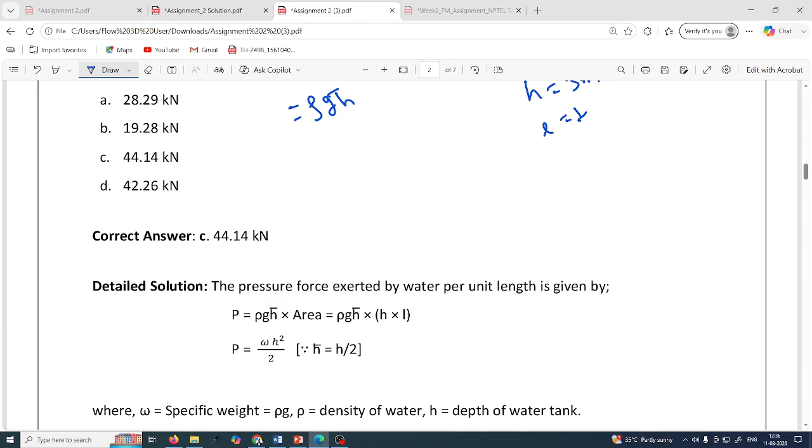Now what do we need to calculate? Rho g h bar. h bar is h by 2, because it's rectangular, though it is not written very clearly here. The water tank contains 3 meter deep water, so it should be a rectangular water tank; then the question would be complete, and we could understand whether to use h bar for circular or rectangular. So slight correction is required. No issue, we'll use h by 2. It's a similar question, so I won't go into much detail. Let us move on to the next one.

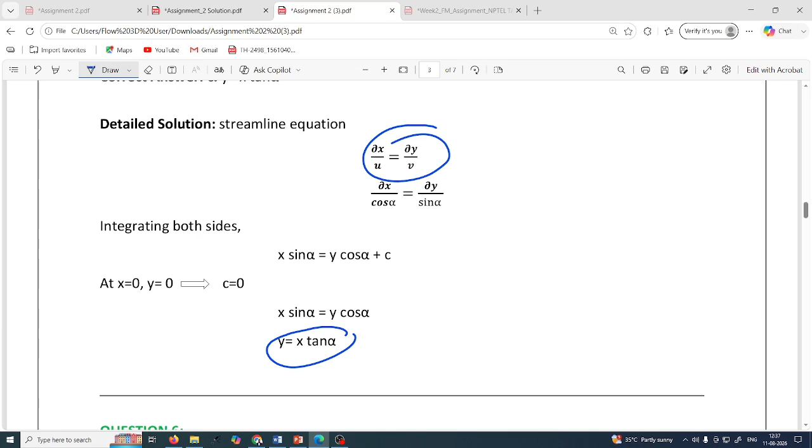Next is question number 5. Again a similar question: the equation of a streamline passing through the origin, x and y equal to 0, with u component cos alpha and v component sin alpha. I am repeating this question because it is very important. So dx by u is equal to dy by v. Once you put in, dx by cos alpha is equal to dy by sin alpha. Once you integrate, you will get y is equal to tan alpha x. The main thing is you need to remember the formula. Now let us move on to the next one.

Question number 6. A uniform body 6 meter long, 4 meter wide and 2 meter deep floats in water. If the depth of immersion is 0.6, then... We have solved a similar question, because it is a very important one. Again the weight of the body is asked. Weight of the body is rho of the body into volume of the body into g. This value you need to calculate, and it will be equal to the buoyant force.

What is the buoyant force? It depends on the immersed volume. Let us first write rho of water, which is 1000, and the immersed volume is 0.6 times the total volume. So 0.6 you will put here. Now g is 9.81, or you can take 10, and the volume is given as 6, 4 and 2. So 0.6 V, where V is 6 into 4 into 2. When you multiply, you will get the final answer.

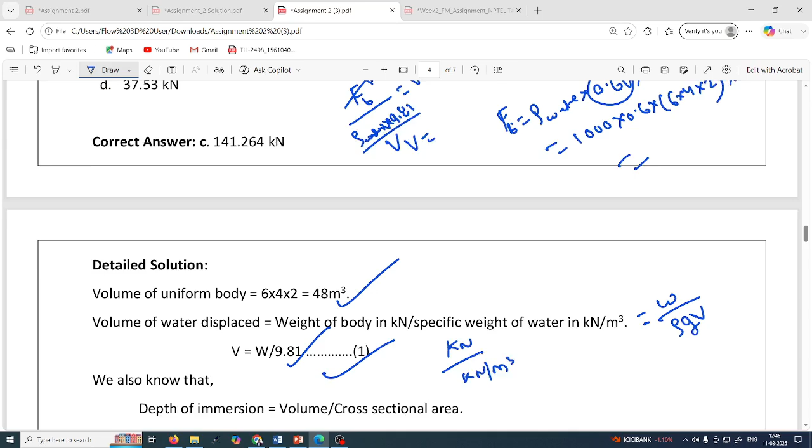Okay, let me just solve in a different way. So I think this is correct, because it is not weight only, it is the specific weight. So weight divided by volume, so whatever volume you write here will be cancelled out. So this is correct, I think. But the answer should come if we solve like that also, because it is a very simple way. Where is the mistake? Something is missing. I'm doing a mistake in this question, I think. So let me see in a different way.

So here is FB. FB is equal to the weight of the body, rho of the body into volume of the body into g, which is equal to the buoyant force, rho of water into volume submerged into g. So g will be cancelled out. The density of the body we need to calculate; let us suppose the volume is V, rho of water is 1000, and the submerged volume is 0.6 V. Why 0.6 V? Because the depth of immersion is 0.6 meter.

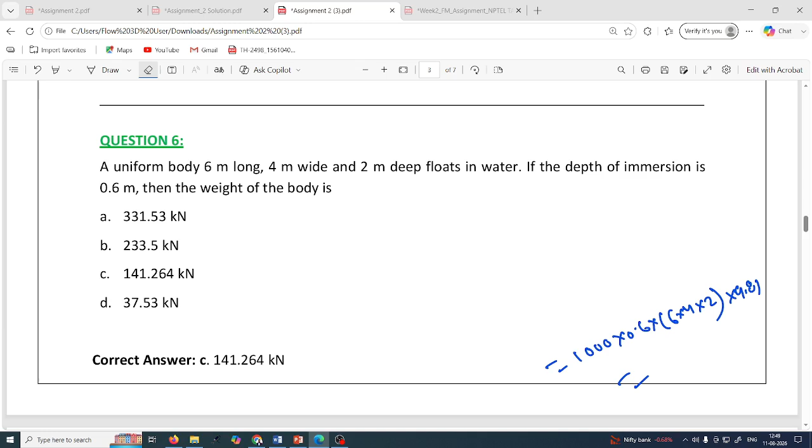Let me just erase. So you need to read the question very carefully, please. So you have the body, 6 meter long, 4 meter wide and 2 meter deep, it is like that. If the depth of immersion is 0.6 meter, means 0.6 meter only, remember please, and this is the rest of the volume. This is 1.4 because total is 2 meter.

Now your weight of the body is what? Weight of the body is nothing but FB, and FB is what? Rho of water 1000 into the volume of immersion. Volume of immersion is what? 0.6 height, wide is 4 meter and long is 6 meter, into g, 9.81. So now you can calculate, you will get the answer. So 1000 into 0.6 into 4 into 6 into 9.81,

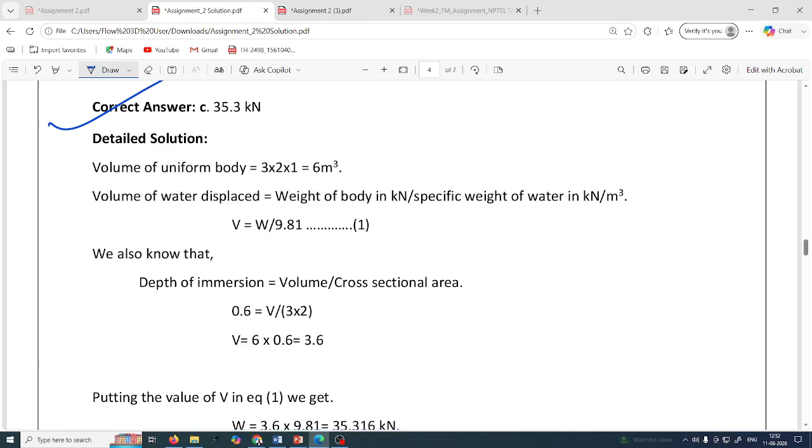A similar question I have seen. Let me just see where we solved it. I think in that place also I made a mistake. So let me just clarify. Yes, here is the similar mistake I made. So here you can also correct the same thing. Here you can see the 0.6 meter immersion and the 1 meter deep. So this will be 0.4 and this will be 0.6.

So weight of the body is what? FB. Very simple. 1000 into 0.6 into 2 meter wide and 3 meter long into 9.81. So when you calculate, you will get the answer. So hope you understand. 1000 into 0.6 into 2 into 3 into 9.81. So this will be 35,316 Newton. So in kilonewton, that will be

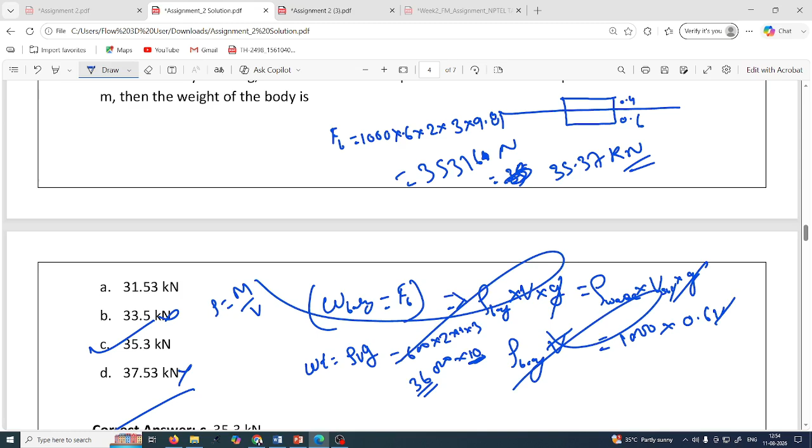this is 0.6, so this will not be there. So Newton. So when we calculate in kilonewton, 35.37 kilonewton. So hope you understand. So this previous one was wrong. So remember please, read the question very carefully, then try to solve the question. Now we have other questions also. Let me just go very quick. Okay, this question we have already solved.

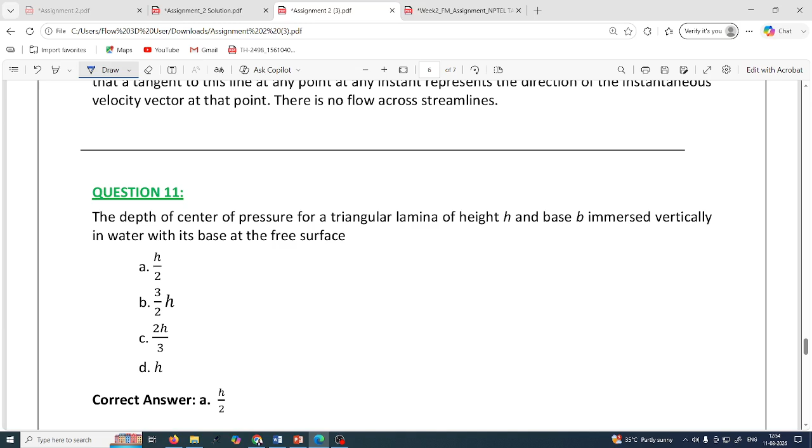We have already seen the two-dimensional flow field with psi equal to 2xy minus x. Determine the velocity. So similarly, you already know u and v, and just take the root over both components. A similar question we have seen, the streak line and the streamline. Here, the depth of center of pressure for a triangular lamina of height H and base B immersed vertically in water with its base at the free surface. So what will be the depth of the center of pressure? The similar question we have seen already. So it will be h-bar plus Ig divided by A h-bar.

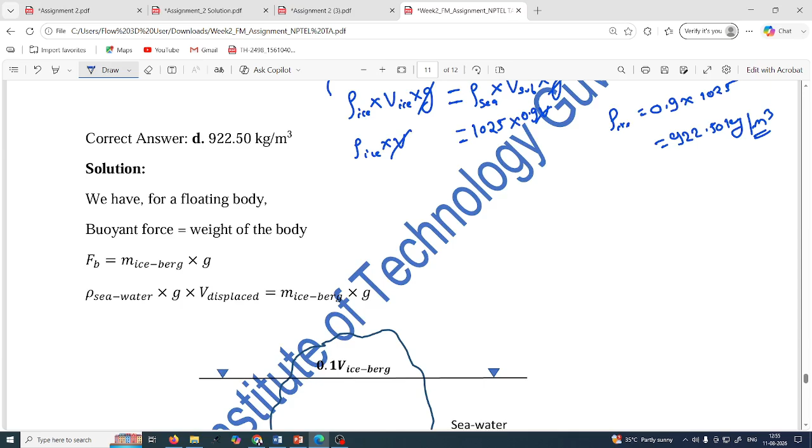So what will be the h-bar? Why I am telling, here we have seen the question. Yes, here we have seen the question. So hope you understand. But in the previous question it was A, here it is H, nothing changes. So question 12, Bernoulli, let me just read the question. For a perfect incompressible liquid flowing in a continuous stream, the total energy of a particle remains the same while the particle moves from one point to another. This statement is called the Bernoulli equation.